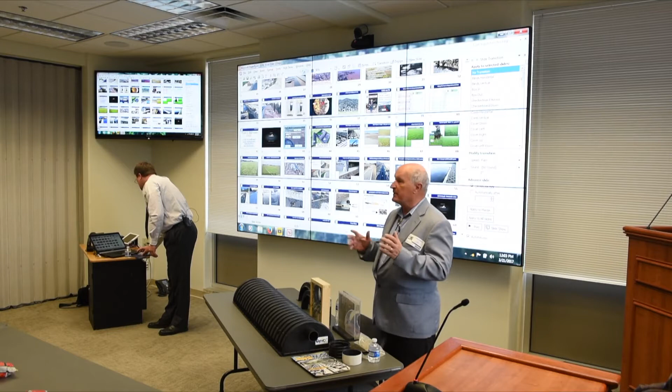To get started, back in the late 60s, when the astronauts started the race program with the Russians, John Glenn and the other astronauts, in zero gravity, found out that ballpoint pens didn't work. NASA was really upset. They spent several million dollars and years of research to invent what they call a space pen. But during all that time, the Russians were simply using a pencil. So the moral of the story: the world we live in, water management does not have to be as complex as the space pen. There are simple solutions for the goals we want to attain.

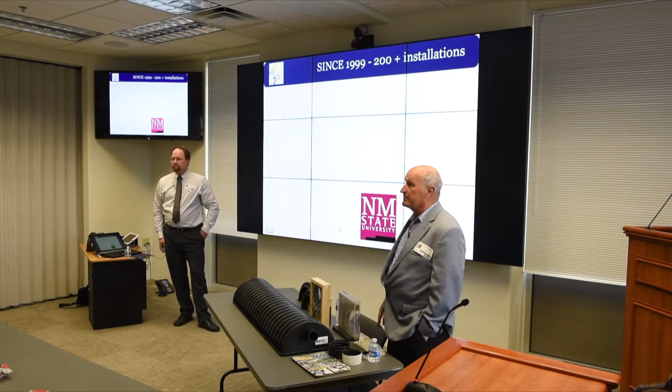Evaporative Control Systems is a Reno company. Since 1999, worldwide, we've installed over 200 plus installations. We were used, vetted, and researched by 3 universities: New Mexico State, UNR, and UC Davis.

We have been used and approved by major municipalities like Minneapolis, City of Los Angeles, and other small communities like Santa Barbara, Marin County, Yountville. The Department of Defense has used our project. The Army Corps of Engineers has vetted and approved us, but we can't tell you where that one's located.

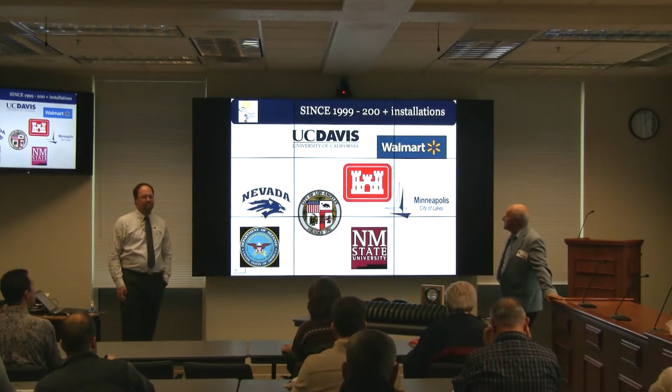At the same time, major corporations like Walmart, Firestone, and Harley-Davidson have used it on their projects. The ASLA, American Society, has given us awards on 2 of the projects. And in 2011, the technology won the prestigious award of the most innovative water management product by H2O magazine. So the moral of the story is, yes, we're small, we're new, but we're not here to sell you snake oil.

And we're not here to use you as guinea pigs on future projects you may have. The technology has been around and is well thought out and proven. Jonas got the patent in 1999, and it was developed here locally in the northern Nevada area and researched here in Nevada.

So anyway, EPIC has many applications. In a short elevator speech, it's really a tool where the user can manage water movement underground in 3 dimensions: laterally, horizontally, vertically, all done by basic physics and gravity. That's the tool. It has many applications.

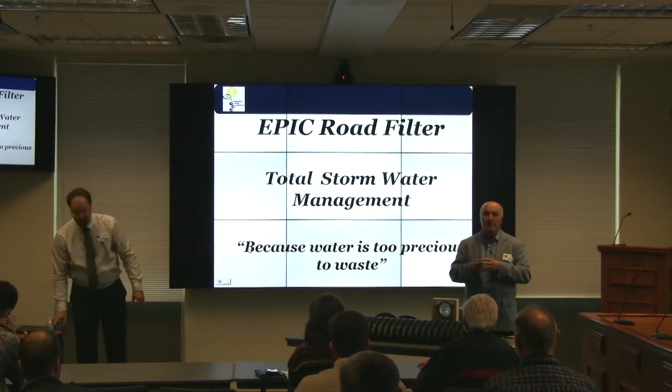Today's presentation is going to focus on road filtration aspects, on why we want to apply this technology in that particular field. And I'll leave it up to Tom.

Well, if we look at the history and anatomy of the road, the paved surface is not new. It's been around since 1893, the first paved road in Ohio. Lane markings were actually come up with by Edward Hines in 1911 in Detroit, Michigan. Rumble strips from New Jersey, 1952. Wider rolled shoulders for safety purposes came from Ireland and onto the United States in the 70s and 80s.

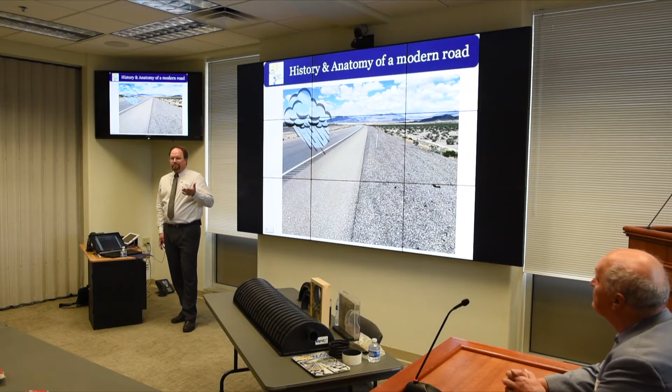But when we think about the anatomy of the road when a storm event takes place, what's really happening is prior-to-1st-century drainage dynamics and physics. We're essentially just sloping the road off to the side. I say prior to 1st century because there's evidence of Roman roads, like this one in Turkey, that still exist, that have ditches on the side of the road, and we are simply shedding and sloping that water away. We're holding an umbrella over our heads and shedding water away.

Our concept we're going to portray to you today is the idea of how we can turn that umbrella upside down and capture and reuse that water for more efficient use.

So the erosive nature of water—this is the beginning of erosion that takes place from the side of the road. How many people here, in their wet weather plans, spec straw wattles? Show of hands—kind of common in the plans. But as you can see, there is some damage that can occur and some buildup from different flood events. You have water that goes around each wattle.

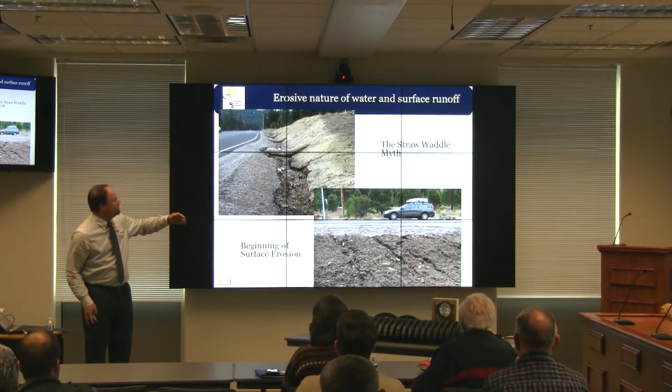Jonas, you took this picture up around Tahoe? Yeah, one example of that is a straw wattle will not control volumetric buildup. So water that passes one wattle increases in volume by the time it reaches the next.

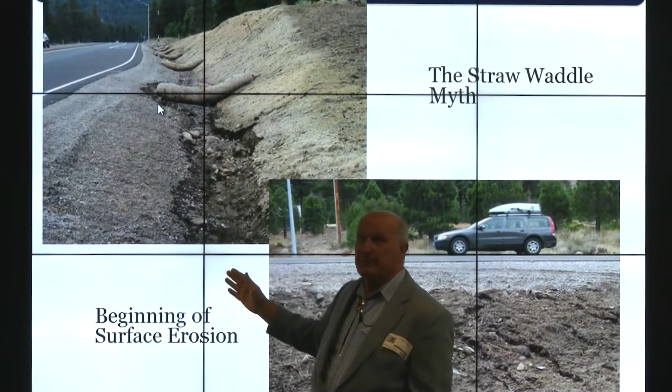So in this particular case, a damming occurred, water built up, the water went around the dam, and started erosion. Now you had a surge that actually eroded more material than if there was no straw wattle. You really worsened the situation, otherwise you would have just maybe had a deeper trench or furrow down the middle. So it's not a magic solution.

Well, it's a maintenance headache. You have lots of erosion buildup. As you all know, sediment is a big contribution to erosion buildup. You have lots of wear along the road base. And it's really a lost resource.

So what we were speaking with Jason King, the state water engineer, about is that there is a feasibility that the water captured on the roadways could actually be a new resource. There was a study done in Colorado where they found that 97% of the water that hits the waterways is either lost to evaporation or to native plant growth, so only 3% makes it to watersheds. So why are we wasting this water resource when we could be able to utilize it and not lose it to evaporation?

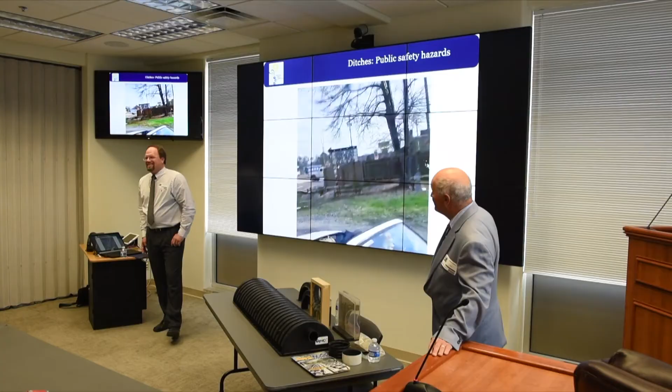Another aspect is the safety issue of ditches. This is a little video that we got from Florida. Some of you may have seen that on Facebook, but ditches love cars. I know our videographer Brian was in a rollover accident in his teenage years, so he made sure to reassure that we wore our seatbelts on the way here today, which you all should at all times.

But it's this water management that becomes a public safety issue. Is there an alternative to ditches that we can utilize? And that's what we hope to present to you today, that there can be, in fact, an alternative. There are maintenance improvements and cost improvements that we have by maintaining these ditches, but is that really saving money? Is that really saving lives?

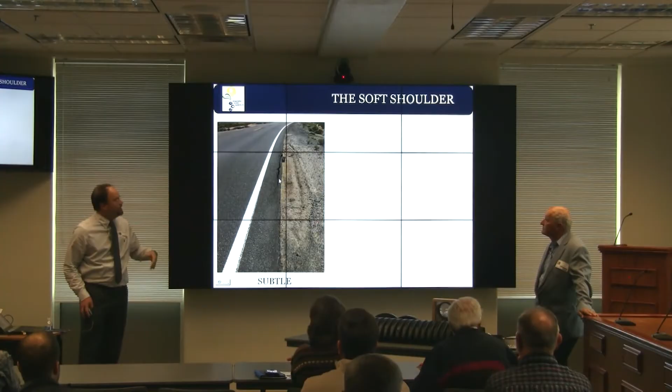You can see when you don't have a ditch and some of the erosion that takes place, the subtle effects of a soft shoulder slowly starting to erode away, which especially after this winter can increase dramatically. This is near my cousin's house up in Washington State, where the entire hillside is essentially flooding away. And what we did when we looked at the pictures closely is we found some of our engineering technology that was being utilized for the drainage that essentially failed, and Jonas is going to elaborate.

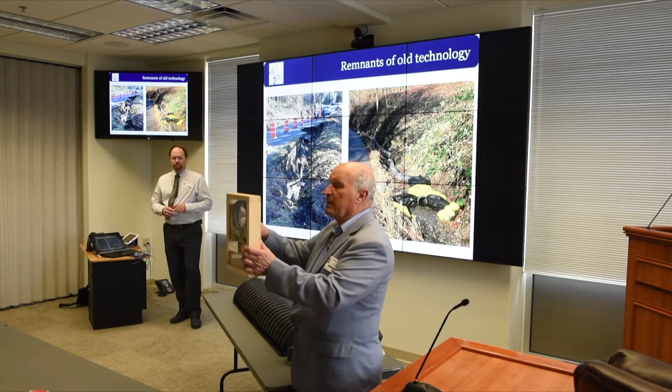The problem with sand, and sand is just a particle in soil, is when it's totally saturated, it acts like a liquid. When it's totally dry, it acts like a liquid and it pours. The only time it doesn't act like a liquid is when it's just damp.

Now, how many people spec perforated pipe in their plans? Right, that's pretty common too, right? And yet, still a faulty technology.

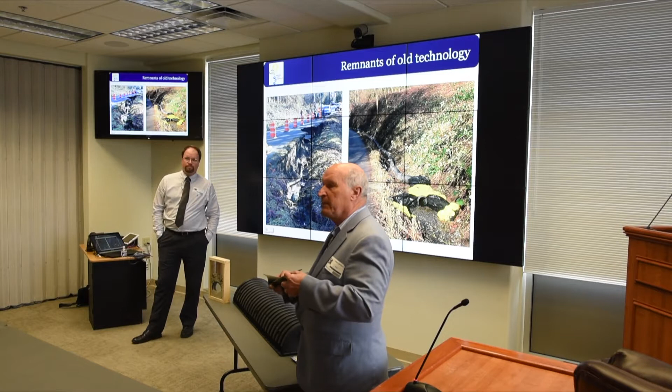Now, to resolve that, in the 80s and 10, 15 years ago, they said, well, let's wrap the pipe in geo-fabric, and that's what they did, and you can still buy that today. But what we're doing then is simply making a smaller opening over an already small opening. It's very similar to your coffee filter—try running it 3 days without changing the filtration, and the water is going to overflow.

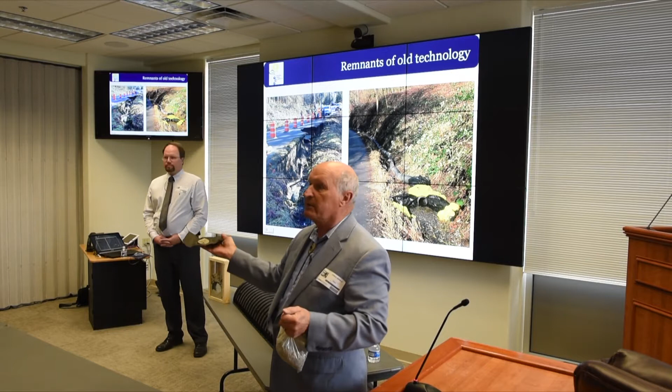And this is what happens: the pipe then plugs on the outside, and the water never gets into the pipe. So you may install millions of miles of this, but it has no functionality because when it rains, nothing comes out the other side. To demonstrate that, I even took rock, small rock, with just clay material on top of that rock. If you run water through the filter, this is what the geo-fabric holds up. 4 pounds of rock gives you a 1/4-inch layer of clay on a geo-fabric, and this stops water movement altogether. I can pass this around.

So how many people are speccing geofabrics in their plans? Most likely for porosity reasons, but eventually they do clog up, they do become a liner eventually, and that's essentially what we're portraying.

So the other aspects of water management that take place: if we aren't controlling the water movement from the sides of the roads, especially with snowbanks, it can build up and become a safety hazard as it comes across the road. The snow melt can freeze overnight in these spring temperatures. So the goal of public safety is really part of what we're portraying.

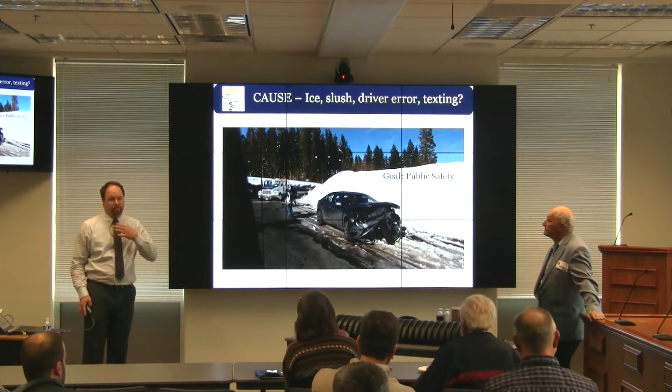This accident that occurred, was it caused by ice, slush, driver error? Was he texting? We don't know. But if some of the water on the roadway contributed to that accident, that's something we as engineers can help alleviate and fix for future generations as we design the roads of the future.

And you go into urban areas, it's expensive infrastructure. You require large pipe, deep trenches have to be dug. Hemet, California, for example, paid over $4 million to extend their drainage capacity for 1 mile.

The answer has always been to move water. We have to build bigger movement apparatuses to move more water away, build a bigger umbrella. For that $4 million, we could have done for 25% of that cost, and made all those trees in that slide completely sustainable from the roadway stormwater management.

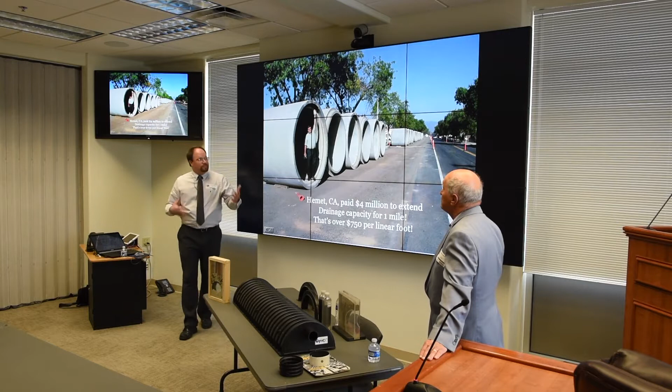So there's different aspects of what we're trying to portray, that there's different ways, instead of the space pen, that we can manage our water instead of move our water.

Some of the management techniques we're currently using is curb and gutter. Some of those costs can be as low as $4 for just the curb. If you go to curb and gutter systems, upwards of $30. I've heard up to $55 a linear foot for curb and gutter, depending on the application.

This is what I call the conventional catch basin blues. There's unprotected basins, then they're blocked by debris. If we protect them, we may bypass them with a straw wattle.

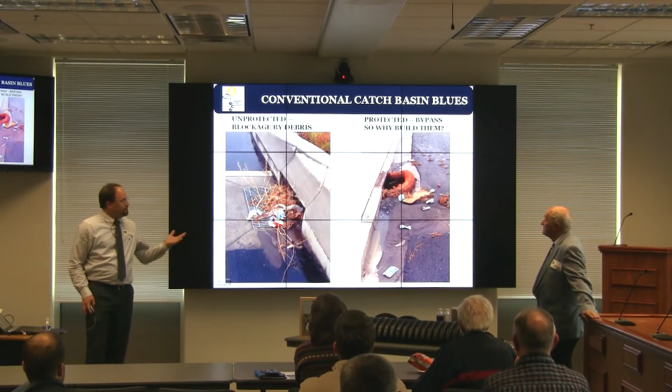So why are we building these in the first place? It's really an attempt at filtration, I suppose, if we're trying to have a cultural message by painting 'drains to the ocean, drains to the watershed.' And we have the physical attempts of filtration too. That geo-fabric most likely was completely ripped apart from the very first storm it encountered. But the destination is ultimately reached, and these are the types of contaminants that are reaching our systems.

And there are different filters that exist now. You see the catch basin bags. What we have is a type of filter we're going to show you that we feel is self-cleaning, with a longer lifespan, and better for the money. But you can see all the contaminants that reach that destination.

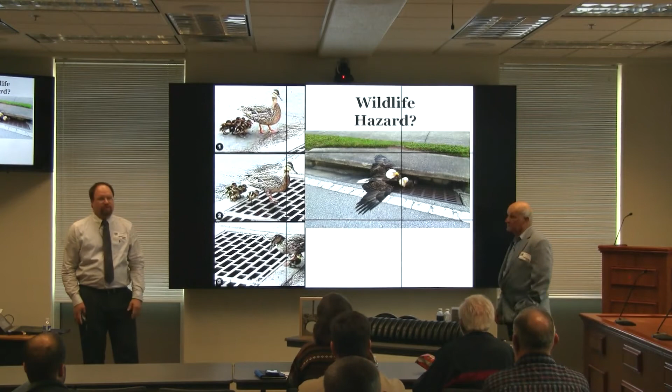Sediment, of course, being the biggest contribution, but it can also be a wildlife hazard. The family of ducks can lose their young. How many times do you see a kitten rescued from the storm drain? These eagles just this last year in Florida - I know it pulls on the heartstrings a little bit, but there are benefits to animal wildlife and habitats in storm drains as well. So I guess they're serving more of a purpose than just moving water. They're becoming a conduit system for these different travelers.

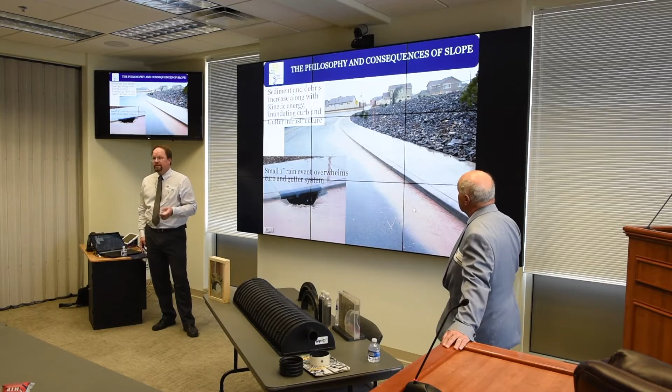Even as we xeriscape to try to save and conserve water, the water movement still goes underneath the rocks, and really the biggest pollutant problem is the total suspended solids, the TSS. That brown muddy water is what will pretty much bypass all of our hydrodynamic separators. A lot of the filters we have in place to control sediment do not address TSS. And this is where phosphates reside. Phosphates are a positive charged additive. They cling onto the clay, so they're carriers. So if you have brown water, you have phosphate movement. Unlike nitrates, which are negatively charged, and move in a different pattern.

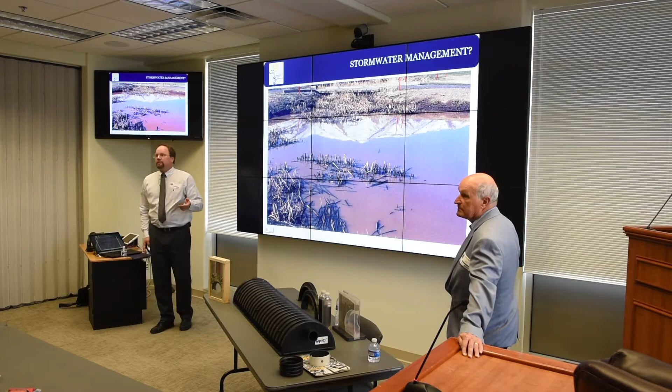How many people have soil tests and have to check percolation rates for their plants? Just about everybody, right? Well, those percolation rates, as you know, can change over the course of time. Even though we designed these storm detention ponds to percolate and get rid of that excess stormwater, the first incursion of muddy, silted water is going to clog up those detention basins, similar to the basin of a river or a lake. So that clean, pristine snow that was draining into this then becomes the coffee silt that we see, and there's really no perceived value to the client.

It's a waste of real estate. We usually have to fence off these areas for safety, and it becomes difficult for maintenance to even come in and dredge out those sediments. You have standing water that's an exposure for the disease-spreading West Nile virus, mosquitoes, a haven for geese. But most importantly, for the money, for the client, you're wasting real estate that could be a few more houses, a Starbucks, or some more parking in the urban area.

And that's part of what we accomplished with SR28, that we're able to utilize stormwater management. Even silt fences—look at the erosion above it and then below the silt fence. Did it really do anything? It's really not a ground infiltration mechanism.

Right now, look at Lemon Valley. Why isn't it infiltrating and recharging groundwater sources? No, it's just a big lake waiting for evaporation to occur, because the mud, the silt, the clays—even a layer as narrow as a millimeter—is enough of a barrier, like plastic, to prevent groundwater infiltration. That's just the nature of physics. So the porosity isn't there when we're dealing with clay situations. It's similar to that geo-fabric we passed around—you saw how caked that clay was on top.

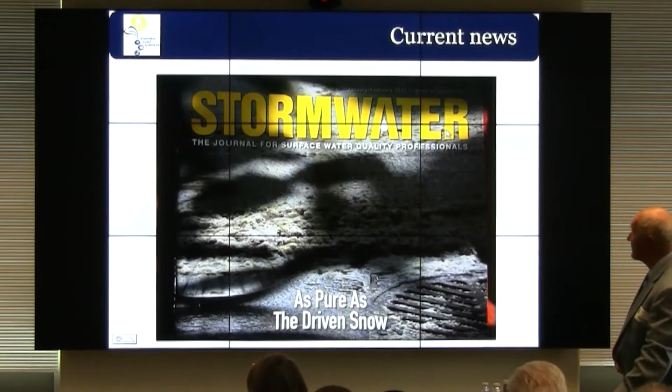Now, an interesting article came out in January in Stormwater magazine, and what caught my eye is it's described as pure as snow. Well, snow isn't as pure as snow—look at this winter event we had. Go anywhere along the road, you start seeing blacker and blacker snow. So what is this material? This is Lake Tahoe in 2016.

We actually went out and took some of these black snowballs and melted them down. What we found is, eventually the melt occurs, and your exit points are all going to go to the lake. So the best BMPs we're doing now—this is a melted snowball. This is what's going into Lake Tahoe right now with the best BMPs you have out there. I'll pass this around. What's curious about this slide is look at this: after one week, this black material doesn't even settle out. It just stays in suspension.

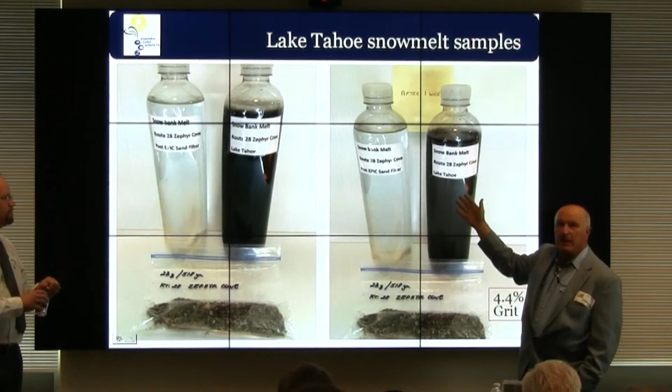So I was wondering, why is it black and why is it in suspension? Because what I filtered out was only 4% of the material. The filtrate was really sand-like, asphalt bits, sand-like bits. This is a 1 millimeter spacing, but you see these small particles—these are tire bits. They're in a pulverized form.

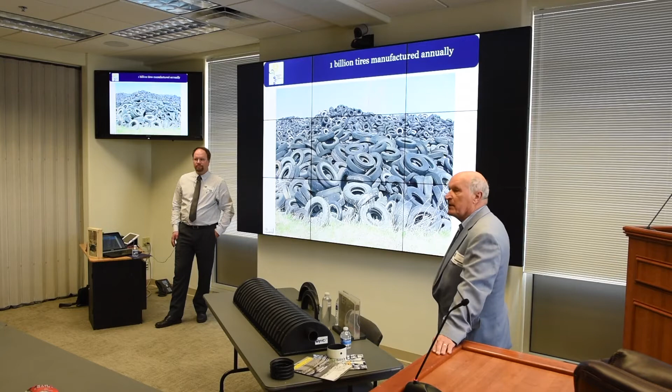Now, if this pile was in Sand Harbor, all hell would break loose and be all over the newspaper. But in reality, this pile doesn't really do much. It doesn't decompose. It has a hazard of breeding probably 1 billion mosquitoes once the water settles in the tire, but it's not an erosive factor.

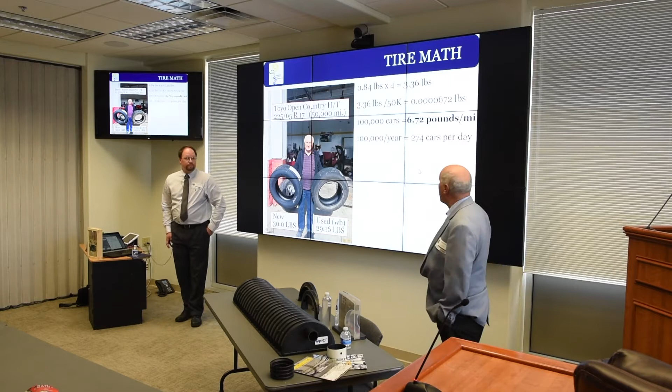Now, I took a tire, same size, same everything—new it was 30 pounds, used it was 29. So a tire over 50,000 miles loses 0.84 pounds per tire. I have 4 tires on a car, so over 50,000 miles, it's a minuscule amount, but once you have 100,000 cars, it's 6.72 pounds of tire bits worn on the road. And how much is 100,000 cars per year? It's 274 cars per day, 11 cars per hour. When we were driving to Lake Tahoe, there was an accident and we got stuck for a while, and we counted pretty close to 274 cars right there in that minute. So there's obviously more cars than 100,000 cars a year.

You guys could probably tell us—how many cars drive around Lake Tahoe? It's by the millions. And so these tire bits, this tire wear, is something that's going unchecked and draining into our current stormwater watersheds and into Lake Tahoe. That bottle we're passing around is what we're currently shedding, and we can be able to filter that—we can clean that up.

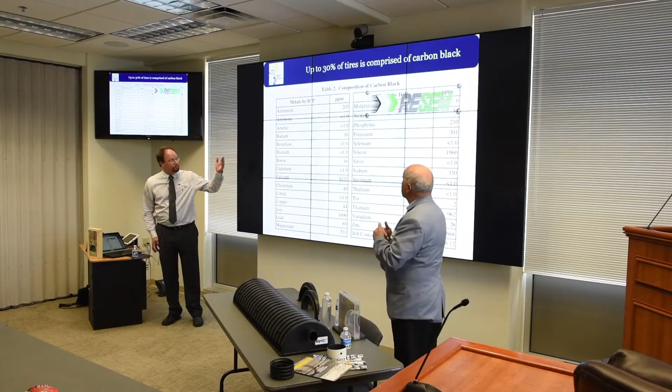So if you analyze carbon black, what's the consistency? Analyze it, there's a lot of stuff. What caught my eye was 4.5% zinc. I don't know what the value is. The heavy metals people are concerned of—arsenic is less than 1 part per million. Is it 900 parts per billion? I don't know, do I really care? Maybe. Cadmium—oh, sorry, yeah, let me go back for you here.

There you go, cadmium again, a small amount. Oh, lead is a little more, it shows up at 69 parts per million. Well, it doesn't meet drinking water standards. I know that. What do we do with it? What are we going to do with it?

But more interesting is some of the higher readings. You look at calcium, 9,000. Keep on clicking. Magnesium, phosphorus, potassium. All of a sudden, carbon black gives me 5 of the nutrients that plants like.

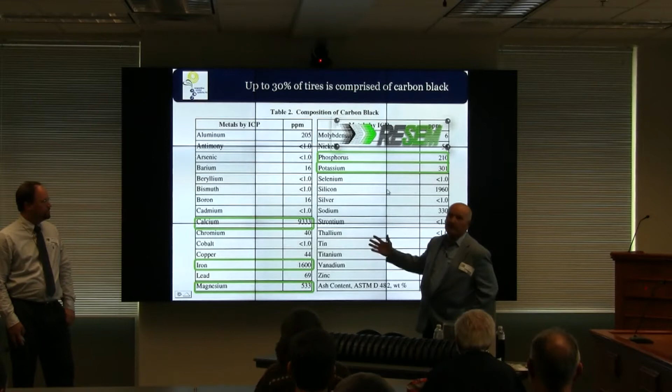So I already have a nutritional solution that is going to cause some type of eutrophication. If it's a small body of water, this is what starts inducing algae growth and plankton growth, because it's a fertilizer aspect. Is it a crisis? I don't know. Some people call it a crisis, some people don't. I'm just looking at reality, and you take over.

Well, really, we like to say there is no water crisis. We just need to look at the way we're managing our water sources differently, and that's where the EPIC system comes into play. A lot of this eutrophication and algae blooms in Tahoe Keys and some of our lakes could not just be caused by fertilizer runoff from lawns. It could also be, as we demonstrated, caused by tire wear coming off our roads.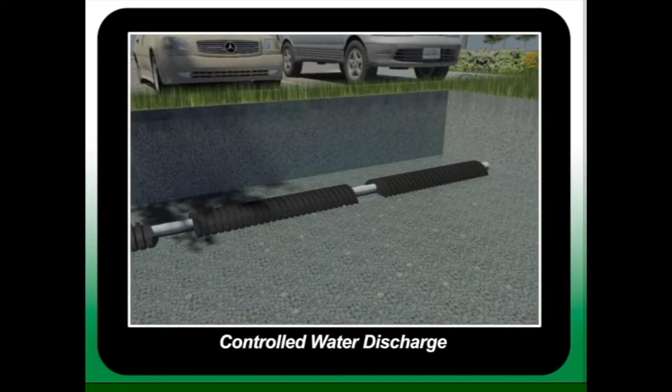As the water moves downward through the sand, into the fine gravel, and through the gravity trap, into the EPIC chamber. When stormwater or surface runoff drains to the system, the sand profile immediately initiates filtration. The chamber and connector pipes distribute the water evenly throughout the system and retain a designed amount of water for irrigation reuse. Excess water can be transferred to a secondary containment, below or above ground reservoirs, or discharged directly out of the system at a designated location.

When water is introduced into the chamber for irrigation, the chamber uses head pressure to inject water into the sand profile, which then initiates an upward capillary rise action into the root zone. This highly aerobic zone is exceptional for promoting root growth and simultaneously functions as a biofilter. The EPIC system brings together passive irrigation, water storage, and filtration into a single, customizable, low-maintenance solution.

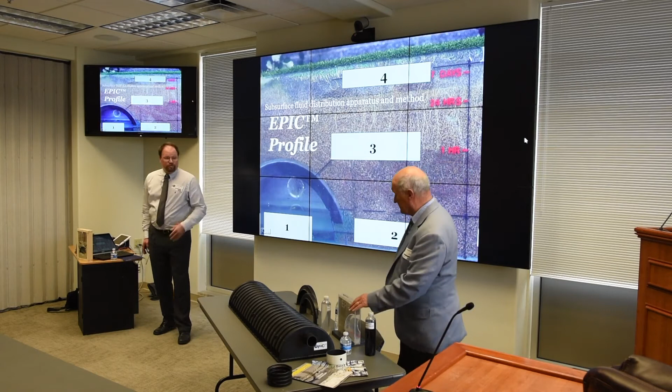So what Jonas has invented is an apparatus that will not clog in subsurface profiles, sand profiles, or gravel profiles, whether you use gravel for drainage filtration or sand for passive irrigation. So the basic unit here is the EPIC chamber. It's equal on both sides. This is a rib of the EPIC chamber. This is a cutaway view, so when you look at the rib, this is a halfway area like that.

The nice part about it is even when you use sand, sand is not hydrophobic, so even a little bit of water spreads out and gets absorbed by the sand right away. If you have dirty water, it really gets settled within a half inch of the sand profile. Even clay cannot penetrate a fine sand material. So the filter captures at the surface where it's easily maintainable—you don't have to dig these profiles up, you can just simply treat the surface for maintenance.

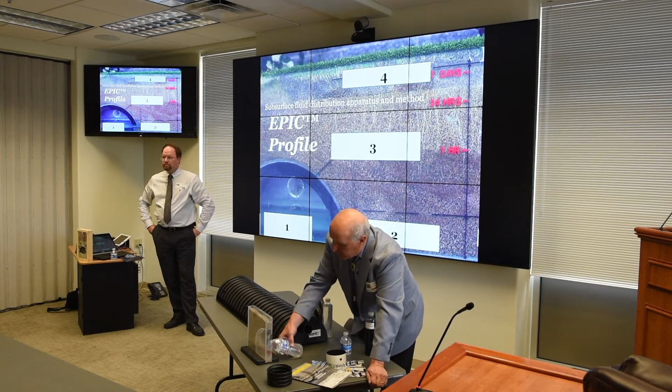So if you have a filtration event, it simply goes down, finds the gravel, flows horizontally, goes through this gravity trap, and then into the unit. If I'm using it for irrigation or retaining the water I've just captured, water fills again by gravity very slowly in a chamber, but before it exits the pipe on the other end through the 2-inch portal, it has to overfill that inner hole, as you see happening now.

When that happens, it spreads out horizontally very quickly, and then the water intersects the sand profile. When that happens, capillary physics takes over, and the water starts to move upward, as you can see in the rise. Now, in most United States sands, this upward capillary rise peters out at about 12 inches.

When we were in Dubai, the fine dune sand actually capillarized 24 inches, so it has a higher profile because it was a finer, rounder sand. So every sand has a unique fingerprint on how fast it rises and how fast it drains.

Once the water is in a profile and spreads out, the profile actually holds 2.5 gallons of water per square foot. It becomes like a giant sponge. You can drive on it, you can walk on it. It's not quicksand - the quicksand portion is way below, at a 3-inch level.

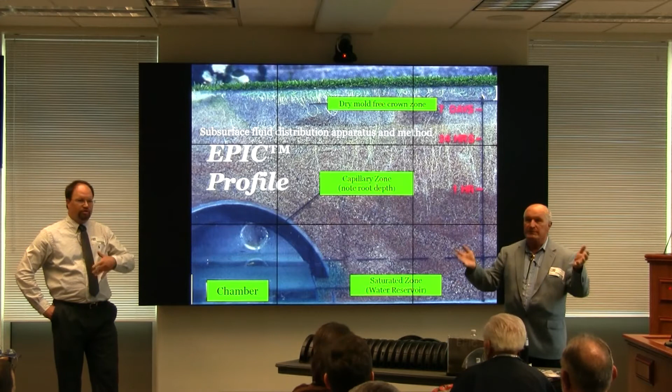And if it rains, excess drains. If you're out, it capillarizes up. So most sands that we use have a drainage capacity of 1 inch per 10 minutes. If we grow grass, the capacity decreases because of root structure, then we have a capacity of 1 inch per hour. But I can still keep up with, for athletic fields, 23 inches of rain in 24 hours, and a car can come out and drive on the field in 5 minutes - similar to a car driving at the beach at low tide. It has that consistency and firmness.

So the three - go ahead. Well, actually, everyone got a chance to see the tire bottle, right? Now, here's the bottle that we've filtered through the Epic Sand Profile. So just like washed sand is used to filter our drinking water, we're applying that to landscapes and road filtration.

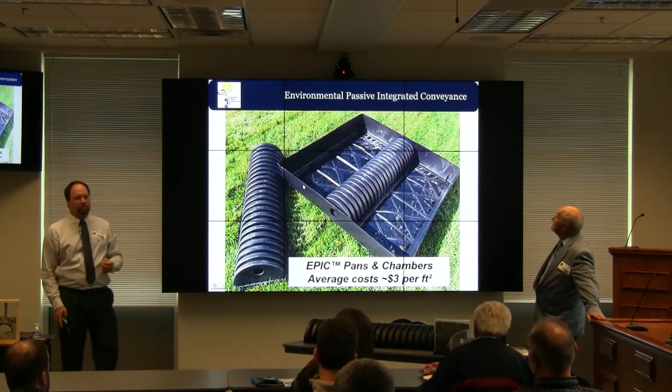So the components of the system - EPIC is not just fun to say, it's actually an acronym for Environmental Passive Integrated Conveyance. We have a conveyance that can reliably move water three-dimensionally subsurface without clogging, and that's the chamber. Then you'll have some kind of water barrier to prevent the water from being lost into the water table, so then you can reuse it for biological plants. Together they make what we call an EPIC cell.

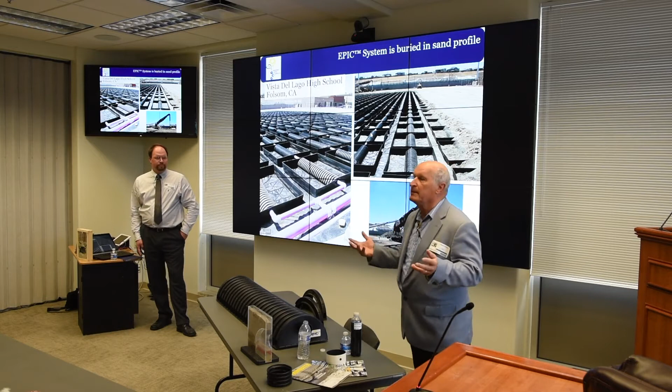Yeah, if you introduce your contaminated water into the root zone, your plants do the final polishing. They absorb the phosphates, they absorb the nitrates, they absorb calcium, iron, magnesium. All these things become part of the plant structure, and that's your final destination point. It's bioremediation - so we have aggregate filtration and bioremediation.

So you'll notice the purple pipe - you can mix and blend different water sources to be used as irrigation because there's no human exposure, it's all subsurface. In this case, for this large field, it could be a park, there's lots of applications. The pump near the maintenance building pumps to the header pipe, then it's all by gravity from there. It's a laser level field, there's no crown.

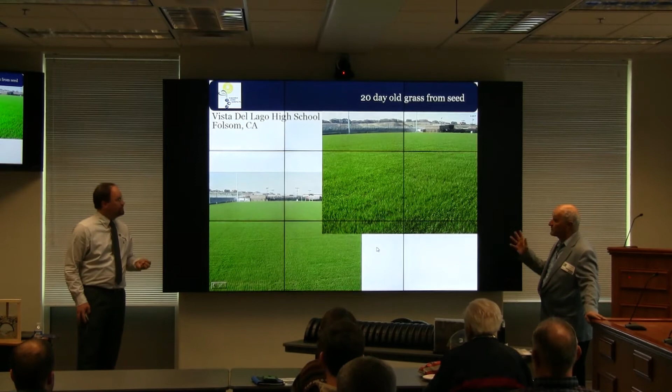We drill seeded Kentucky bluegrass. It germinated within about 8 days, never been surface watered whatsoever. At 20 days, we had edge-to-edge germination, no hot spots, no wind pattern loss. It was perfect germination. This was actually done in August in Sacramento.

By 45 days, we had 4 to 6 inch root growth and was ready for its first haircut. And by 90 days, it was ready for play from seed without ever surface watering. The field 7 years later is still quite playable, and some of the cost factors really came into play as well too.

The water connection fees for a sprinkler irrigation would have been a 3-inch connection. In that area, the water connection fees were around $750,000. The water connection fee for EPIC is only 1 inch, which is only 50 grand. So we can literally pay for the fields themselves simply by reducing the water connection fees. Then in addition to the real estate savings by not needing storm ponds, a lot of money can be saved for the client, offering ROI right out of the gate.

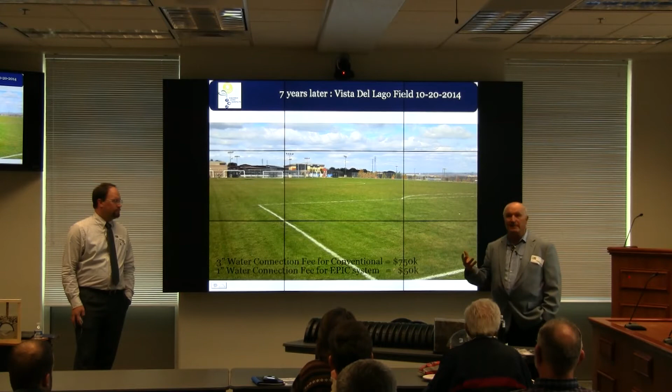And the reason it's so low - our demand rate for even a field is a flow rate for a pump of 12 gallons per minute per acre to provide irrigation. And that can be accomplished by a half horsepower pump. We don't need a lot of pressure, a lot of volume. We just do everything slowly.

And we irrigate once a week, even when it's 100 degrees. We just recirculate the bottom reservoir. Now the field is located right here. You can be able to see it's still green. This is pictures taken 7 years later.

The one adjoining is an artificial field. If they had chosen to, they could have used this for the base, because we can actually help cool artificial surfaces using something like a heat sink. Similar to how you can hold a lighter underneath a paper cup and it won't burn the cup, it'll boil the water. Same principle of being able to help cool these athletic surfaces.

But what interested me most with this picture is take notice of the sprinkled areas on the baseball fields. There's lots of wind pattern loss and hot temperatures on this hot hill above Sacramento. So we're able to save the school money, use efficient irrigation, reuse stormwater, and have a better quality turf. It's just a win-win-win for your clients.

So when we apply this back to roadways, let's get back to drainage again. We just want to show you we can grow and bioremediate, but you can build a drain as well too. At Summit Fire, they were able to install this along the edge of their parking lot area, so the greenscape becomes irrigated from the sheet flow from the parking area.

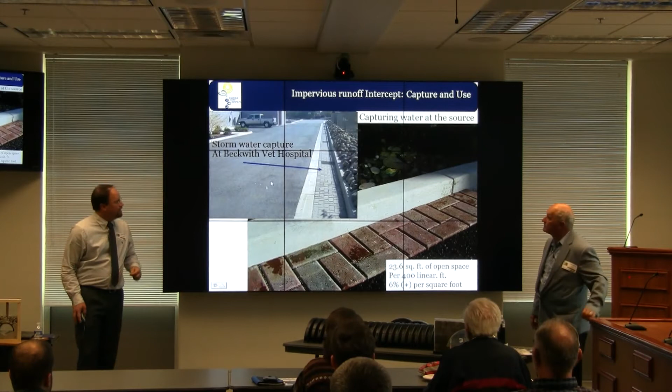This is Beckwith Veterinary Hospital in Modesto, California. It's a LEED Platinum installation that is entirely sustainable from stormwater. They actually capture all their stormwater that hits the parking lots, and instead of catch basins, which are 3 square feet of openings every several hundred linear feet, we have porous pavers, similar to what Belgard utilizes, and that equals over 20 square feet of openings in between the crack of these porous pavements.

So we can capture directly at the edge, at the source, and then for this installation, that goes into a 300,000 gallon cistern located underneath the parking lot. They even have, for geothermal heating and cooling, radiator lines that go through the building and through the reservoir, because the reservoir is always at 60 degrees, so they have a BTU exchange. We cool the coolant of the reservoir, it goes up and down the building walls, it cools the building, hot heat goes back to the reservoir and stabilizes at 60 degrees — what we call BTU exchange.

In addition to the management of the landscapes — here, just in our backyard, and if any of you want to tour this after the presentation, we'd be happy to show you around the NDOT maintenance facility just outside.

In this case, instead of sand, we use gravel. We lined the areas, had the epic chambers connected together around the perimeter of the maintenance yard, then we put the porous open grid pavers on top. So here's the finished surface — everything flows into the epic filters.

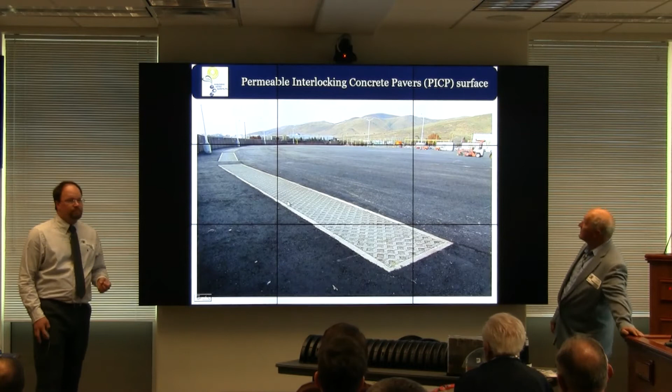So no matter what activity you have, even with a 1-inch rain event, everything flows to the low end. At the low end is the filter — look at the filter, it's not a puddle, the water simply disappeared through the gravel. It's a high absorption rate. You can see the sheet flow doesn't even make it across the whole filter, it's like a little triangle there, and that's doing most of the work. But if those ever get clogged by debris, they can then have many other pathways to be able to get to the final conveyance.

This is up at SR 28, by Incline Village. You can see on the right side of the sidewalk, those are private property infiltration ponds that were trying to accomplish the same method we're doing on the left side of the sidewalk with the EPIC system, only we're able to do so much more because we can clean the water through that aggregate profile. We have a geo-fabric to allow infiltration, but if the geo-fabric fails, there's still a final outlet — we can still connect to a header pipe and discharge that clean filtered water to the outfall on the other side of SR 28.

What the structure shows is you can have variability in width. At the NDOT yard, it was 4 feet. At Modesto, it was only 2 feet. It could be narrower, it really doesn't matter — the more area you have, the more filter capacity you have. This is 12 feet wide, so this is the access road.

But the sidewalk is tilted, the parking lot is going to be tilted — everything sheds onto this area where filtration occurs at the surface. Your pine needles from Lake Tahoe, cigarette butts, baby diapers are all going to be at the surface. We're only picking up the water, treating the water, and then sending it to the lake.

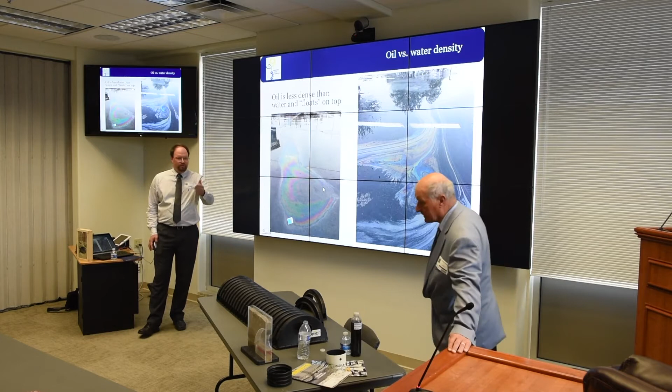And everyone knows that oil floats, right? Less dense than water. This is also a unique feature of the EPIC chamber: we have a passive oil-water separation that can take place, and Jonas will explain how. What's happened with oil molecules, the sheen that you're getting is a refractive thing of light. The molecule is only several molecules thick, so it's very thin, but it floats on top of the water. But this is the reality.

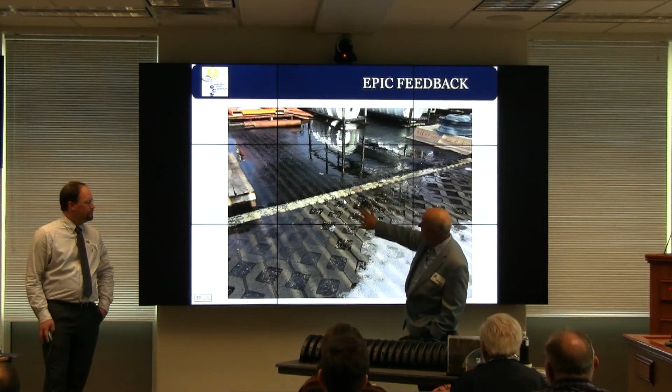Even at the NDOT yard, you can see this oil sheen on top of the water disappearing. Here we had more of a sheen that was already starting a plugging action, so it's traveling sideways to a non-plugging area. So in a sense, the EPIC gives you feedback. That's when we were walking around. A plugged section no longer infiltrates, but it goes to another section.

So it tells you when it's time to clean, and cleaning might be as simple as just vacuuming, or maybe in 10, 20 years you may want to replace the top 4 inches of gravel. But it's never going to affect the pipe - it's never going to plug at the pipe because it occurs at the surface. The maintenance is at the surface.

We took these pictures when we were walking around with Z the last time we were down here at NDOT a few months ago, and we noticed some heavy equipment machinery is shedding a lot of oils, but it wasn't reaching the storm drain. That's the most important aspect - the filter is working and capturing it at the surface.

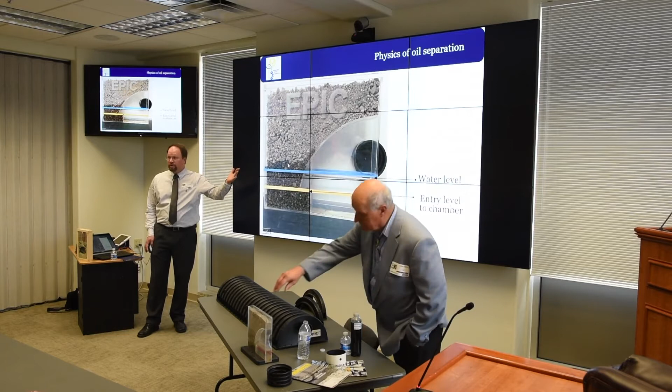And when it does make it down, it never really makes it into the discharge, into the stormwater system, due to the floating oils - they are at a higher connection. The connection to the chamber itself, the offset holes, is lower than the connection that goes to the final storm drain.

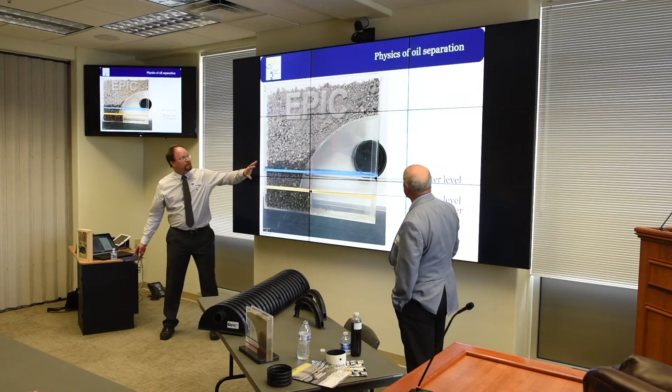So it essentially becomes like a coral reef for biological activity, microbiological degradation that takes place. In microbiology, oils and hydrocarbons, whether aliphatic or aromatic, you're really looking at carbon and hydrogen. If you give carbon and hydrogen exposed to oxygen, and the natural bacteria present in the soil...

Nitrosomonas, Nitrobacter - they have the ability to start using the hydrocarbons as a food source. The end product is H2O and CO2. This is the end product in chemistry. So the coral reef that you're creating is this infinite surface area of fine gravel and sand that gets a coating of molecules of oil.

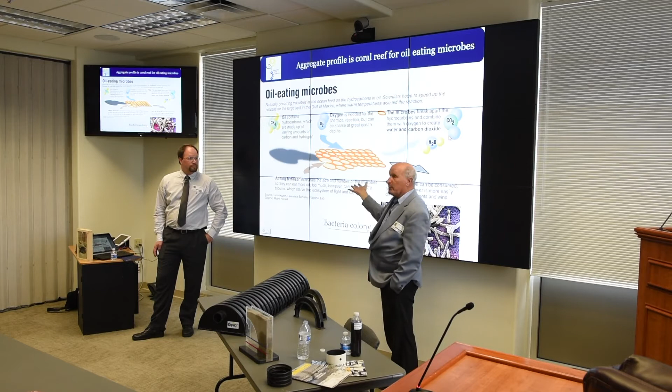Bacteria attack the oil because everything is present. You have oxygen because it's very porous. You have moisture from some capillary rise, left over from the storm event, from the gravel, that gives you the moisture for bacteria to grow. So you provide all the ingredients naturally to induce decomposition. And this is what happens.

Now, if you want to fine-tune it around an oil field, you can introduce bacteria that are more aggressive in oil decomposition, so you can sprinkle that into the profile. They'll survive for a time until natural organisms take over the business. But a lot of bacteria - again, hydrocarbons are just the food source - and a lot of these bacteria exist in nature as well, too, so they'll naturally decompose and break down those hydrocarbons. So essentially it makes our filter a self-cleaning filter that only needs to be maintained at the surface.

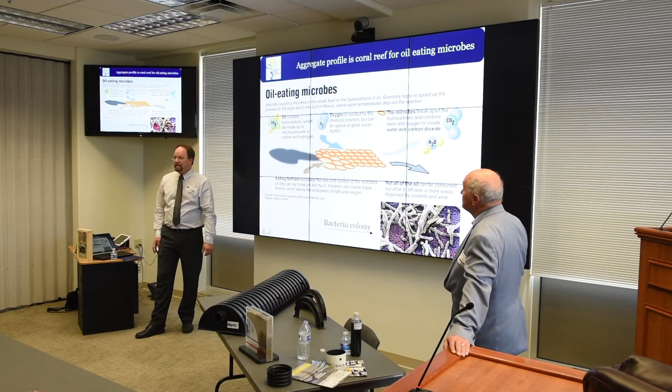And then snowmelt piles, they have another ideal application as well. We have some ideas for around Lake Tahoe, around ski resorts, and other different locations where, of course, after this record winter, snow has become a big issue - where to put it, where are we going to plow this stuff and put it.

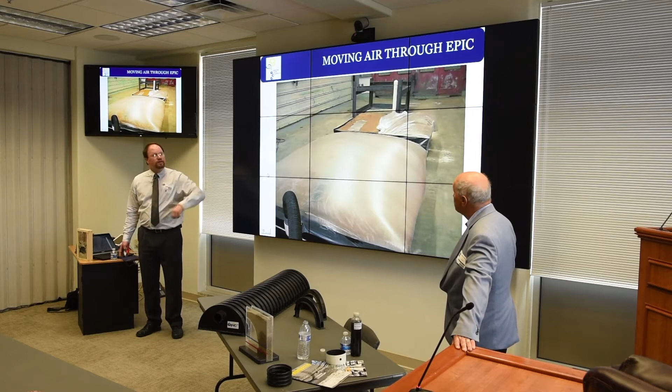But just as equally as we can move water through the profile, we can also move air through the profile. And that's what we wanted to demonstrate here next. Imagine if the filter had an air injection point, like a leaf blower, for maintenance, so they can move air through the profiles on a warmer spring day like this, above freezing, to help melt those snow piles more effectively and filter that melting runoff using the system.

What's nice about this sequence, this is all sand and it's just a vacuum blower, but you can see that even porosity of air, like an air hockey table coming in. Even where you're partially covered, you still have air infiltration under the plastic. And on the vacuum mode, you can use the tool as a vacuum.

So if you have a dewatering situation of sludge, you place the sludge on top of sand, apply the vacuum, and the moisture gets drawn out through the profile. And you have a dewatering activity taking place. Again, basic physics of air and water movement.

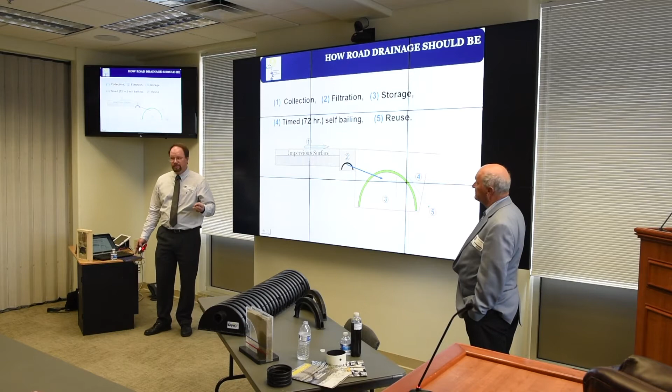So as you move forward and go back to your design desks, instead of looking at straw wattles, perforated pipe, or geo-fabrics, consider a filter on the edge of your impervious surfaces. That's really the philosophy we're trying to portray, that we can filter these edges with the EPIC system. That could be either a sand or gravel aggregate, and then the outflow from the EPIC system can go into supplemental storage.

Well, what can we do with this water? This can also be a larger chamber to store water for reuse. Or you could slowly siphon that off to another source so you have a volume available for the next storm that's coming in. But this is essentially the philosophical sequence that we're trying to promote and encourage you to utilize in your designs.

Imagine, philosophically, let's step away into a big picture. If we had these type of designs all across the state of Nevada, we're the driest state in the union, only 7 inches of rain a year. What could we possibly catch? It doesn't rain enough around here.

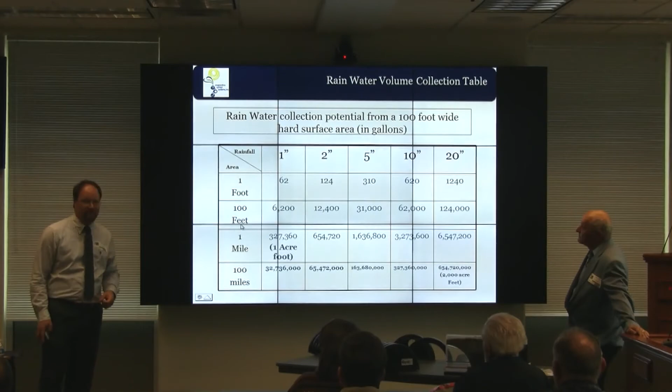Well, actually, if you do the math, the first inch of rainfall creates its first acre foot in the first mile. We can have an intercept capture of $100,000 that could do both sides of the road, just to test in that first mile and see if we can capture that acre foot. If you wanted to capture it and reuse, it costs more, maybe up to $1 million a mile, but there's lots of different variations.

But philosophically, we're actually missing out on 600,000 acre feet a year that fall on the roads in the state of Nevada, and right now are simply lost to evaporation, maybe growing sagebrush or wildflowers. Imagine if we had that kind of volume available around the Lake Tahoe Basin for firefighting if a catastrophe happened in the Pine Tree area, or agriculture out by Fallon, or be able to siphon it into urban areas for reuse.

Being that this technology was developed, researched, and patented here in Nevada, why not have Nevada be the forefront in the nation of water management and water efficiency, to demonstrate to the rest of the states how we can do it right in the desert.

So when we get to the final reuse, what we're really talking about in rural areas is just a 12-inch strip on the side of the road. It still can be within the line markers. It could be a colored gravel if you want to delineate it, or it could be the same gravel, just a fine gravel, but only 12 inches wide.

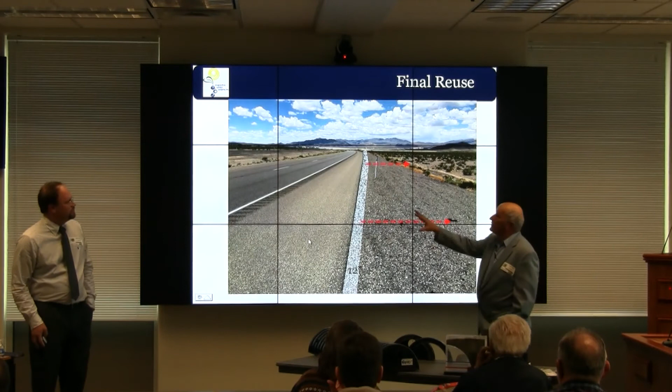Now what do we do with it? Eventually, it's not going to absorb all of it naturally, it's not going to all go in the ground, so you're going to need outlet points, about every 100 feet, those red lines. Because the road is higher, we can outlet and decide what to do with this excess water. It may just simply daylight.

We may have capture and reuse. It may go to strategically placed reservoirs. It may do some agriculture. It may go a half a mile inland and feed a water trough for wildlife. So every time it rains, we're filling a wildlife trough, maybe near a deer crossing or something.

If we have reservoirs, we can have fire fighting reservoirs with risers along the road, and we can suck out water. Or even just a groundwater recharge - we could have recharge wells that connect to the road filtered water. If you have wells in fractured rock zones that are really connecting, you're recharging groundwater with filtered water.

But water may just go to periodic trees - what we call an upflow filter - providing irrigation water passively, and you're just growing something further down the road.

In the Middle East, they did something similar in Abu Dhabi, where for a 30-mile stretch they had trees along the side of the road. They used drip irrigation in that case, but they could have used something like this. Imagine if we had, all through Washoe Valley, some wind-tolerant trees along the side of the road, helping beautify the highway.

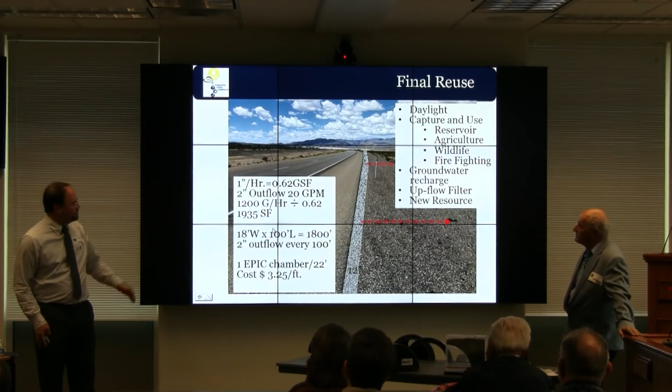It's feasible to do it sustainably off stormwater reuse. We've done the math, and when we ran the calculations we can keep up with 100-year events, and we can also calculate out the cost to be quite effective.

A 1-inch rain is really fairly horrendous - a 1 inch per hour rain is a real big downpour. So for a 1-inch rain, that's 0.62 gallons per square foot. A 2-inch outflow can do 20 gallons per minute, so I have to get rid of 1,200 gallons per hour, which means I can really cover 1,935 square feet.

So an 18-foot wide road bed, 100 feet long, just needs one outfall to handle that water movement mass - that's the red lines we're coming across. From the middle to here is 18 feet, so every 100 feet can be serviced by a 2-inch pipe. If you need a larger volume, you just need more 2-inch outlets. So that 20 gallons per minute is your limiting factor.

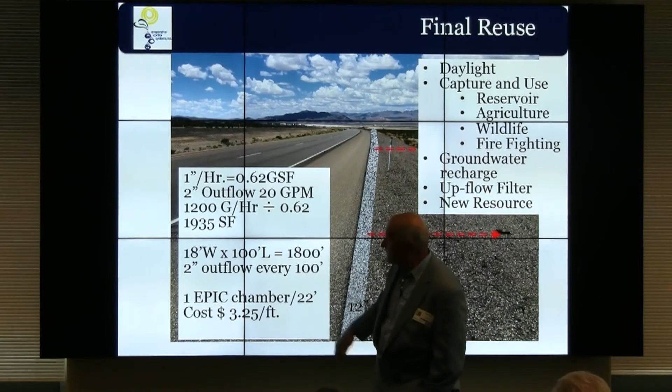How much does it cost? Well, gravel, pipe, and everything - on a chamber you're looking at $3.25 per linear foot. A lot of road improvements have already been done - we've got lane markers, we've got rumble strips. Now we feel a road filter on the edge of the road is the next step, the 21st century feature for our modern roadways.

So the mechanics: this is the 12-inch barrier, and this is the fine gravel - or it could be sand, or coarse gravel. We're looking at it finely.

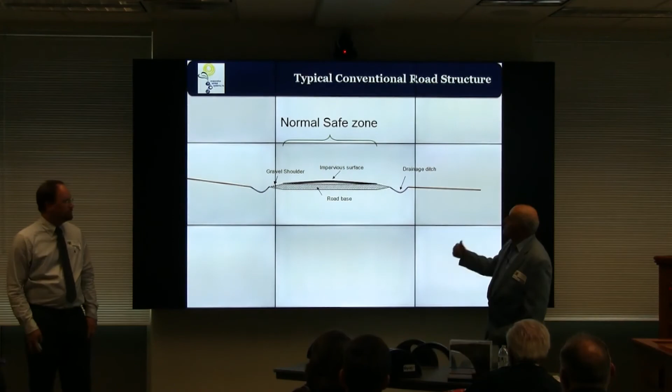So remember the ditch video - what we propose is that instead of ditches, we could have a larger safe zone by expanding out, kind of like a runaway truck ramp on either side of the shoulder. Instead of ditches, we have that water conveyance, with the filtration and the optional storage available as well too. So we're doubling the safe zone essentially by eliminating the need for some of these ditches.

The water harvesting - we're kind of reiterating all the fun aspects of what we believe could happen. We understand that right now, probably filtering the roads is our first priority, but really do consider, maybe even for a test pilot somewhere as these projects come across your desk, you can do so much more with that water you capture, and we can really make a statement for the world.

Even if there is such a catastrophe - Jonas actually has experience with hazardous waste removal. When I worked in hazardous waste, when we had road spills, it became an expensive enterprise. A lot of this side material - sometimes diesel dissolves the asphalt - all that stuff had to be removed and go all the way to Utah as a landfill.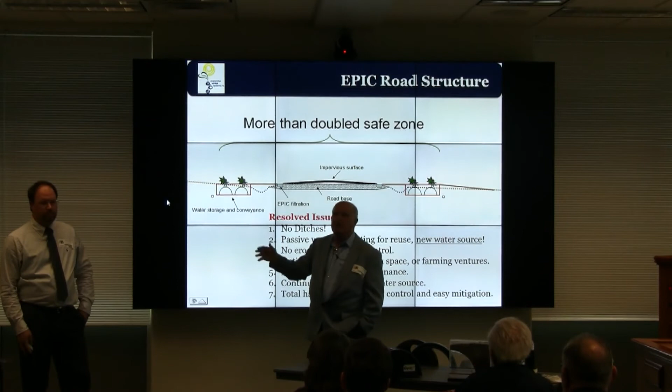It became expensive, and then it has to be replaced. In this scenario, if you have a road spill and hazardous waste, you know exactly where it went to, and you can go to your riser and pump out the contaminant without affecting or digging anything, because you conveyed everything not through soil, but to structures you've created. Then you just suck out the contaminants and you're back in business.

We keep it at the surface. We're protecting the groundwater and the existing vegetation and soils. And it's a segmented system - they're EPIC cells, so they connect together. You're able to isolate which cells are contaminated and treat them at that point.

Now let's talk about cost, and figures are all over the board. This is a 24-foot paved road with one sidewalk, one open ditch on the side, water and sewer infrastructure - total cost $1,200 per linear foot. Broken down: storm drain system $198, curb and gutter $55. Add those together, we're already spending $253 per linear foot on a simple road. The EPIC system does both the storm drain and curb and gutter combined, and we're looking at $3.25 to $11 a foot - less than 5% of what we're spending now.

So we're not proposing we're going to spend more money with new high-tech technology. We're making technology simpler and actually spending less money. We feel we're value engineering for your clients, and for the image of your company and organizations - we can manage stormwater more efficiently and save the client money, all from the same picture.

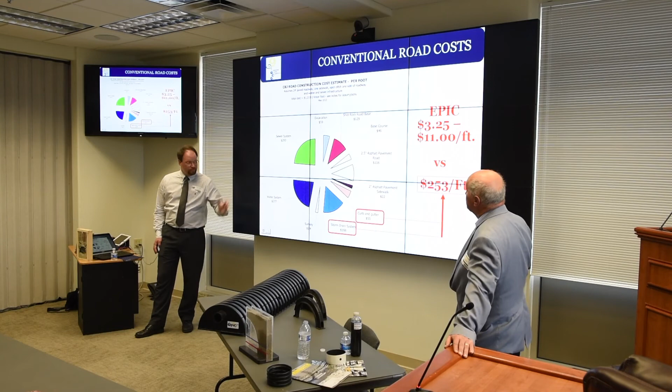So that's really our presentation. This is our ending slide for your questions, answers and discussions. Essentially, what we promote is, instead of using the snowpack and aqueduct systems or pumping from ground wells, there is a new water resource available from the efficient management of precipitation - not the movement of it.

We talked with Jason King, the state engineer for Nevada. He's all for it because the science of recharge really isn't there. So this is kind of in between - we're not a closed system per se. We are capturing and making the water more efficient before it goes into the ground.

It defies logic. Let's say if I need 1,000 gallons for whatever purpose - doesn't it make more sense to capture it and take it from 3 feet below the ground, than to drill a 400-foot well to get my 1,000 gallons, using a lot of power to bring that water to the surface, which is now contaminated with minerals, and I have to treat it? I'm still going to use 1,000 gallons - does it really matter where it came from? If I capture on these little geographic slivers of roads, I'm not affecting the natural infiltration that occurs in the mountains. I'm just using the water I created on my own surfaces, and if I'm using that water, I'm not using the groundwater.

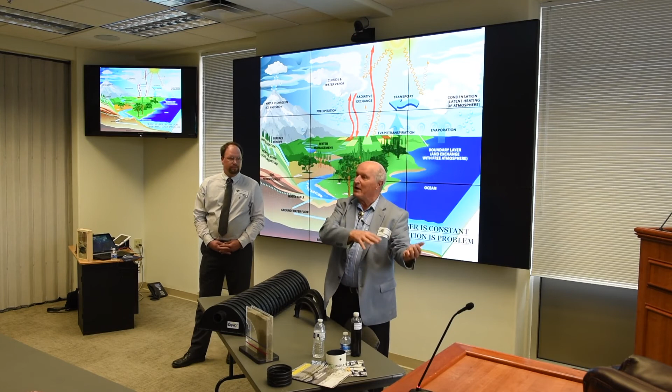Leave the groundwater alone - we'll use it when we're really in deep, dire straits. Look what happened to California. NASA says the California valley shrunk 2 inches. Why did it shrink 2 inches according to NASA data? Because we pumped out all that water, your soil collapsed. Are we going to recover those void spaces? Are we going to raise California by 2 inches? It's never going to happen. So using groundwater should be the very last resort.

If you send us or leave us your email address, we'll be happy to forward you the latest legislation from the Nevada Assembly, where they are looking to allow capture on single residence home rooftops. That's the beginning - well, you started answering before I finished my question, but that's exactly where I was going. I know there is a bill under consideration just down the street addressing exactly that point.

My real question was, had this been vetted by Water Resources and whatever other appropriate folks here? Yes, yes - we went and spoke with the state engineer, Jason King, and after speaking with him, he actually had us come back a second time so we could present it to his whole staff.

He's very excited with the concepts and the logic of being able to capture and reuse water from impervious surfaces. It's really just a hydrological responsibility of humans being responsible for the water that falls on what we build. What happens in nature, we're still going to recharge in the mountains, and that's going to occur, but what hits our rooftops and our roads and our parking lots, we should manage effectively.

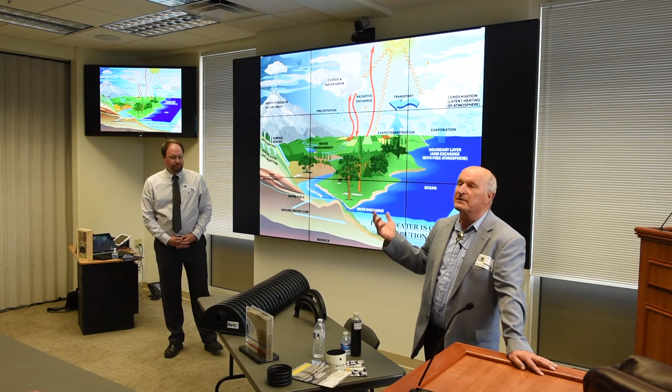Does California own the water because it comes across the Sierras? Does Japan own it because it evaporated from the ocean closer to them? Last February we had a 2-inch rain in Truckee Meadows, over 100 square miles of hardscape. All we did was contaminate that water and send it to Pyramid Lake. Technically it may have raised Pyramid Lake 3/4 of an inch, but that water evaporated in 4 days, formed clouds, went to Massachusetts, and dumped 7 inches of rain. And we call this water management. It doesn't make any sense.

Once it's at Pyramid Lake, you're not going to get it back. It's going to evaporate. Lake Mead evaporates 80 inches during a year, that's 326 billion gallons of water going to the atmosphere. That's science. You're not going to change that, you're not going to put plastic over Lake Mead to prevent evaporation.

But if I have underground reservoir systems, there is no evaporation and no algae growth because it's underground. I can store that water forever, and it's very clean, and then I retrieve it when I need it. That's why we're labeling this as a new water resource. We're capturing, storing, and filtering water that otherwise would have been lost to evaporation.

When Colorado enacted that law in 2009, their conservation district did a study and found that 97% of the water that falls upon surfaces is either lost to evaporation or goes to native plants. Only 3% would maybe make it to watersheds in the Colorado River. So reusing the water that falls upon us, we feel, is the most effective means to add to our infrastructure, to have smart engineering for the future.

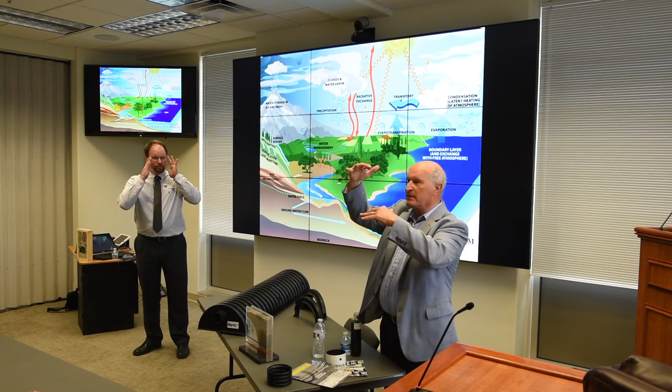What's frequently unknown in physics: 1 inch of water in sand will wet the profile 10 inches, but that water is locked up now. It doesn't move any further down by gravity, it's just evaporating. So if you have a 10-foot column in front of the legislative building and a yearly rain event, you're never going to see water at the bottom of the column because it evaporates before it really moves down.

And your question's more about who owns the water. I know there's water credits they give in Las Vegas, where they give you a credit to put water up to Lake Mead. One example Dad's used is that Lake Mead is 1,000 feet lower than Las Vegas. Their philosophy is we're going to dump all the water into Lake Mead so we can get credit. We dump 1 million gallons, we can withdraw 1 million gallons of water.

Well what you're saying is I have a gallon of water, I'm going to go in August and pour it on my driveway and come back a week later and retrieve it. It doesn't happen. The water you've just dumped in Lake Mead, which is a pizza oven, is not going to be there to retrieve. It might be on paper, but physically it's not going to be there. So is that how we control water management? That's not reality.

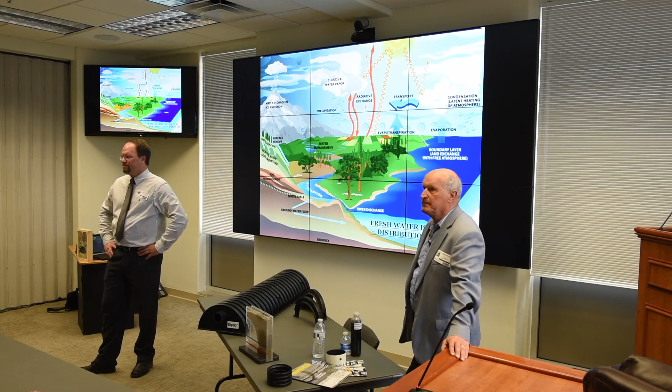I'm only here as a devil's advocate. So what are you going to do when our neighbors downwind from us start suing us for capturing the water they would naturally plan on as rainfall? Well, Jason King, the state engineer, had mentioned that this, of course, would be a delicate issue that we take project per project, and it's a slow process. We've been doing this for over 20 years. We're excited to do it right now, but we do want to make sure there are no adverse effects to adjacent basins and folks downstream.

But you have to admit that from some of our current techniques, like the tire tread issue that we're introducing, simply filtering the water first from the roadways really is a priority.

We really need to be hydrologically responsible for the water that we are shedding to the watersheds. Then down the road we can tackle that philosophical issue of capture, use, and storing it. But it is actually mandated in Los Angeles right now. If you look at pages 46 to 47 of their LID Stormbook manual, the new version for their SUSMP regulations, this type of technology is mandated. They have to get a permit to demonstrate that they are capturing and saving the first inch of every rainfall event and reusing it on site.

So these type of systems are utilized for all the landscape. All the roof downspouts go to all the planters and then are reused, with storage underneath being reused. It's my opinion that that type of philosophy will spread across the country, but time will tell, and we'll see as each state decides their stance.

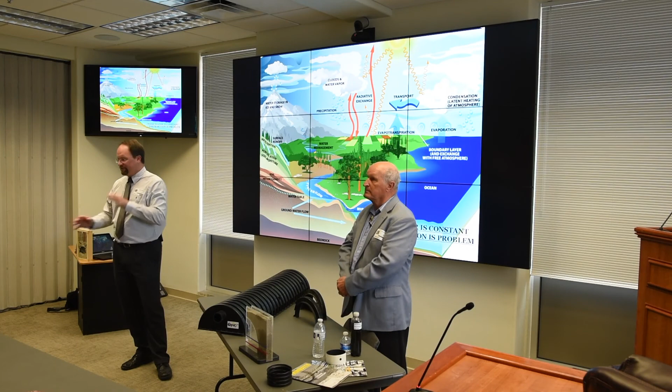But each state can do the same thing. We're in a drier state. If I go to California with a 15-inch climate, I have no problem getting all the water they need. Every landscape project in California can be done and maintained by rainwater alone. We did a 12-acre project in Cambria, California, irrigating 130,000 square feet of turf. That site has no runoff and needs no water. We simply store 1.7 million gallons underneath the soccer field and retrieve it when we need it. That site is self-sustainable on rainwater alone.

Does it affect the rest of California? Does Utah get less water because of it? I doubt it. It's similar to storage conveyances like this. This is a different company - there's StormTech, there's ADS, many different ones. This is Triton from the Midwest. Basically the system exists above a large void space containment like this that we line.

You had a question, sir. Well, I was going to say, I think that we can talk about all sorts of rules and laws, but I think the big point is we're having a water quality issue coming off our roadways. Yes. And I think you have to fix that problem first before we can start fighting over the gallon of water we just treated.

Right, and then the benefit is, by addressing the water quality issue and having the filter in place, now we have the infrastructure. Once we figure out who owns the water, then we can simply plug into it and line it if we choose to. But the filtering, that's the key. That's, I think, our current focus, our current drive.

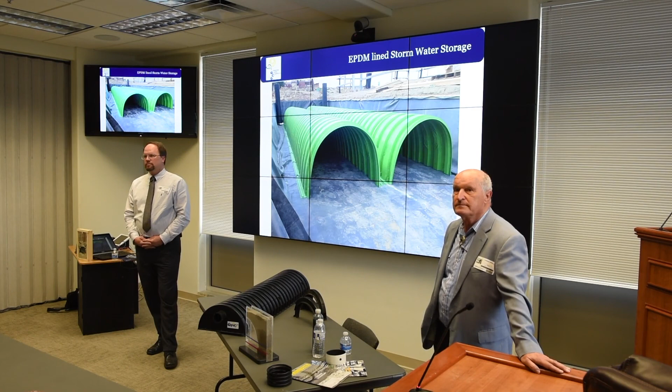I just want to make a comment on that. I've been involved with the Truckee River Watershed Group, Washoe County, City of Reno, and Low Impact Development Manuals, putting the water storage issue to the side. What we do have to focus on is, you're spot on, we need to control the quality of water entering our watershed. We need to cool the water, and this is an ideal system for presenting really good solutions on that front. That's really a key where I can see this being implemented.

This is the technology that we, as the paver industry, have been talking about for probably 10, 15 years. We've seen huge growth in that segment of our business. But, just to the gentleman's point, if we don't worry about the capturing right now, let's worry about how we're going to treat it before it hits Truckee River, before it hits the Carson River, before it hits the Humboldt. Right. Those are all real critical issues.

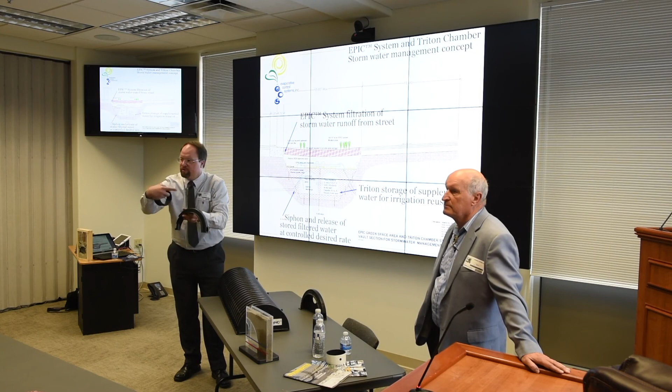Well, and if we tried the same design that we mentioned with perforated pipe, the evil perforated pipe, this has only 2.4 inches of these little 2mm slits per linear foot, where the Epic chamber has 10 to 12 inches of interface holes per linear foot. So we can accomplish so much more water movement through this non-clogging apparatus. That's why it's all based around the offset holes. We can have contact with these subsurface matrices, but the water can pass into or out of the chamber at will. So whenever you see this in your plans, consider replacing it with this. That's really all we're saying to get started as we move forward.

Any other questions? How is the food? I'm starving. You're welcome.